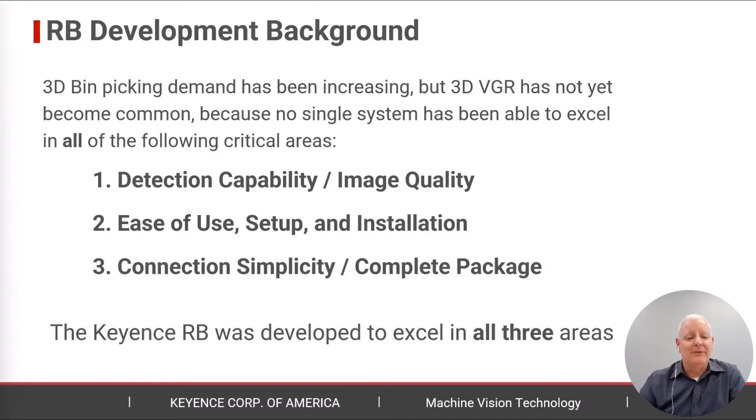I think you'll agree they're important: high image quality and detection capability, good ease of use, as well as easy setup and installation, connection simplicity, and with that, a complete package. So let's talk a little bit about how we've addressed those points.

To start off, Keyence's 3D bin picking product is called the RB. The RB actually comes in 4 different sizes that you see there on the screen. There's a small size called the RB500 that gives you very high resolution, but it has a small imaging area. On the right-hand side, you can see our largest model, which has a 1400 by 1400 by 1 meter deep imaging area.

So for larger parts, this is more suitable. We have a wide range of different heads that we can utilize. One thing you'll notice, it looks kind of like a drone. A lot of people call this the drone bin picking system. The reason is because we have 4 cameras, and these 4 cameras have to be spaced out to give a high quality image.

This equipment is actually designed for random bin picking, but actually a large portion of our applications are single part pick or structured parts, so we can handle either situation. But this is the general structure of our system. There's a pattern projector in the center that creates structured light, and then 4 cameras that actually create the 3D image to then allow for us to do the 3D bin picking process.

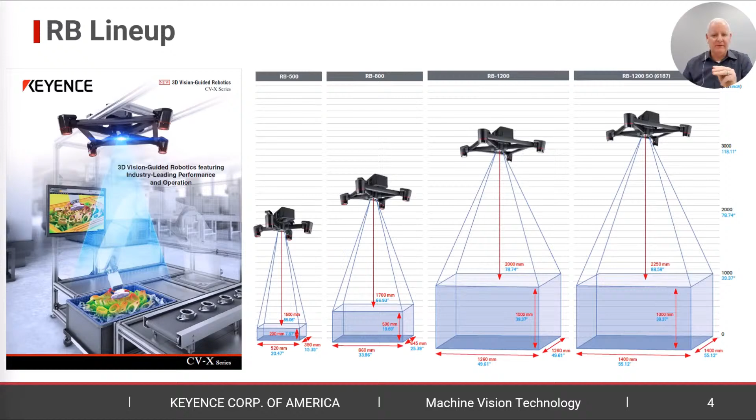I'd like to hit on those 3 points individually and maybe highlight some of the details. Let's start with the image quality topic. One thing I hate is when somebody says, hey, we got the best camera, and they don't explain why. Honestly, it's really simple: the fact that we have 4 cameras gives us a higher quality image than other systems that might just have 1 or 2 cameras combined with a structured light generator.

Why is that? Well, in 3D picking, when you have randomly oriented objects, you're going to have a lot of blind spots. Having these different camera perspectives allows you to see perspectives that you wouldn't be able to see with a single camera. So the simple reality is that you actually get a higher number of valid 3D data points when using this system.

Another thing to consider: many of the applications are shiny metal parts, and when you have shiny metal parts, you can create glare. Imagine if you have a projector and just 1 camera, and you blind that camera with glare - in that case, you're out of luck. And since parts are randomly oriented, some of these parts are going to create glare. But if you have extra cameras, say 3 extra cameras, you can actually create a very high quality image, and if 1 camera gets blinded from that glare, the other 3 fill in the missing data.

Each of these cameras is 4 megapixel, and what we're doing is we're actually doing 136 separate captures that create a single 3D image. That all happens in around a second or so, and the pattern projector occurs in the X and Y direction. So when I say we have a high quality image, it's pretty simple - it's down to these 4 cameras and this capture method.

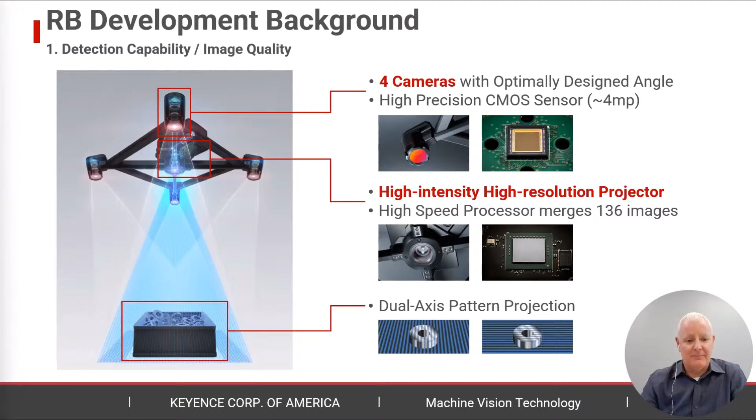Okay, let's talk about the ease of use. Now, ease of use is a little bit intangible, right? But there are some tangible features that we've got that really make it straightforward and quick to set up and learn. First of all, from a calibration standpoint, we have an auto calibration function, which we provide the program for your particular robot, which will automate that process.

It really makes it quick and easy. Also, we can do all of our teaching of grip and place positions on our software without the robot being connected. So you don't have to wait for the robot to be delivered. You also don't have to be standing on the floor to teach this thing - you can do it from the comfort of your desk.

Finally, from the robot programming perspective, we've got a couple features that really set us apart that can make your life easy and lower risk. The first is the path planning function. Path planning allows our system to determine the entire path of the robot for you, so you don't have to worry about it.

We handle all of the collision avoidance and singularity avoidance. In addition, we have a picking simulator which uses a physics engine that allows you to fully test out your end-of-arm tooling prior to ever purchasing the system. So it really allows you to understand on the front end if it's going to work or not, or have a good shot of working.

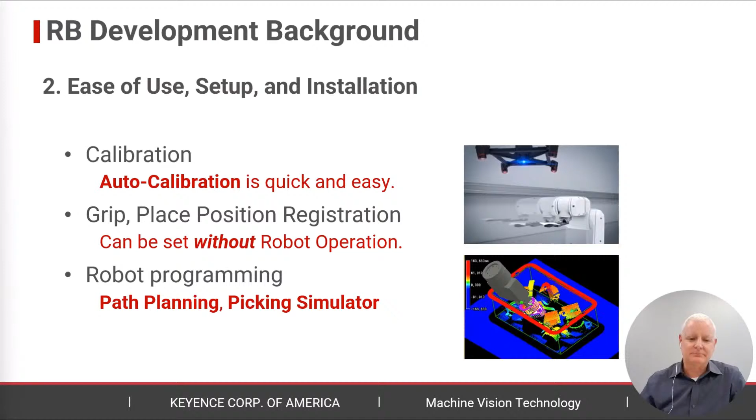All right, the third point, connection simplicity. So the drone, the imager and projector you see on the left-hand side, that's all one piece and there's no moving parts. So you don't have to adjust the focus, the aperture, anything like that. You basically mount it above the work cell and every adjustment inside is electronic. You then connect that to one of our vision system processing units.

This is a very common product. There's 60, maybe 80,000 of these out there in the US. And this is dedicated to image processing and does not use a PC. So you don't worry about OS updates or anything like that.

That then connects directly to the robot controller. And I'll go over some of the different brands we work with, but we actually provide the code that manages that communication. So we very much eliminate the finger pointing that often exists when two vendors are trying to interface with each other.

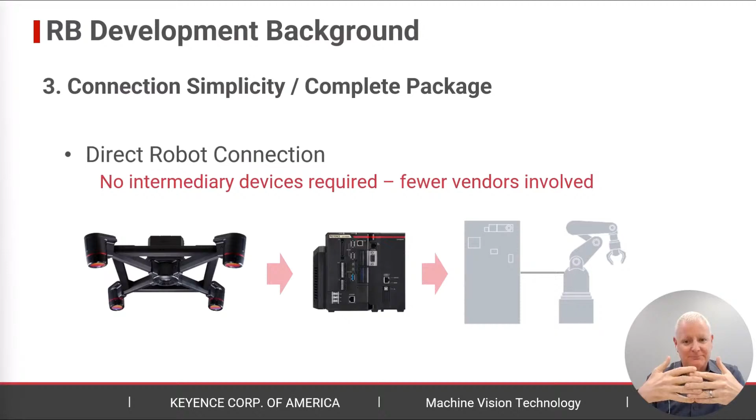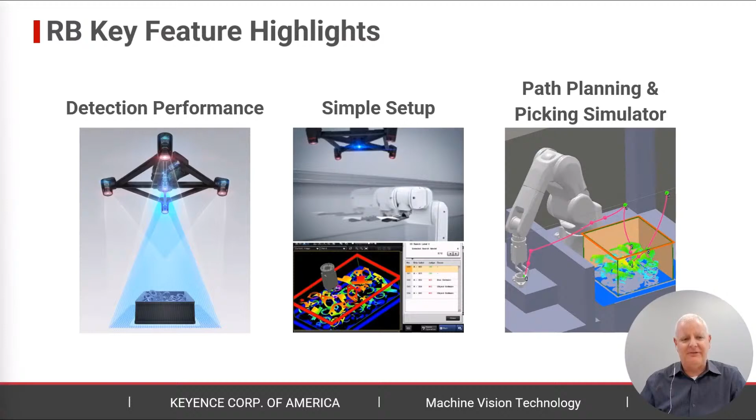All right, let's talk about some of the key features. First, let's talk about detection performance. If you look at that bin on the left-hand side, one thing you're going to notice is those parts are very thin and very shiny.

So they do create glare, and for many systems these are difficult to detect reliably. If you look at the 3D image on the right-hand side, what you're going to notice is that there are a high number of valid 3D data points. What's a valid 3D data point? Any area that's not black. So you'll notice outside of the bin and on the walls, you're getting a lot of invalid pixels. But down there in the corners and on the parts, you can see that it's a very, very complete, high-quality image. And that's down to having those 4 cameras.

On the right-hand side, maybe a little bit hard to see, but there are actually little notches at the 12, 3, 6, and 9 o'clock position on those parts. They're very small as a percentage of the part as a whole. However, we have the ability to assign something called a key feature region, which allows us to better clock that part once we pull it out. And it may allow us to avoid having to have a 2D camera connected, which will then do an offset. That being said, that is an option, and I'll go over that later for our system.

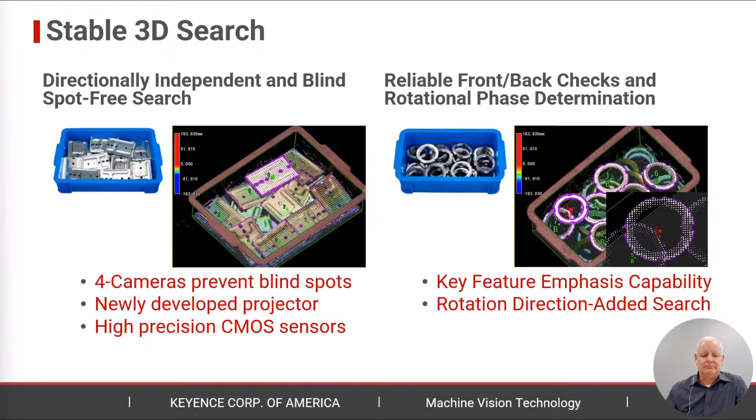Okay, I mentioned before that imaging can be a challenge for 3D picking. If you have shiny parts with flat surfaces at an angle, you can actually project the pattern onto adjacent surfaces, which can cause problems. We actually have a feature that actually helps with this called multi-reflection suppression. Honestly, a lot of people don't need to use this, but it's good to have in that toolbox just in case. So we have this feature that can help you if you need it.

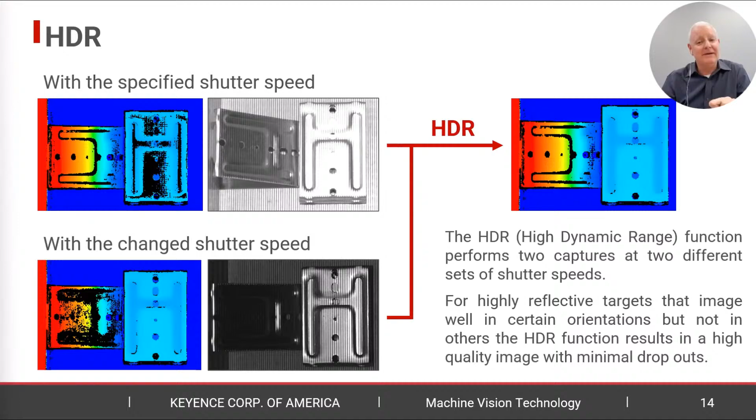Another feature that can help with difficult imaging scenarios is HDR, high dynamic range. Those of you who are familiar with vision systems or photography might know that HDR allows you to capture at 2 different shutter speeds. In this case, what we can do is combine the 2 images together to get a higher quality image. This is another feature that most people don't need to use, but when you need it, it's good to have in the bottom of the toolbox just in case.

All right, so let's look at some videos. We'll start with the one on the left-hand side here. Those are the parts being picked. You can see that we are picking with suction, doing full collision avoidance on that wire basket. We're finding the wire basket and also presenting to a 2D camera at the bottom of the screen, then doing a fine position offset before we place that part.

Now you'll see the flashing in between each capture. That's the 136 separate pictures that are being taken.

Now let's look at the one on the right. What we're going to see is that those parts are being picked from that stack, and those parts are very thin and very shiny. Notice how consistently those parts are being placed. In the upper right-hand corner, you can see that the boundary is very effectively extracted.

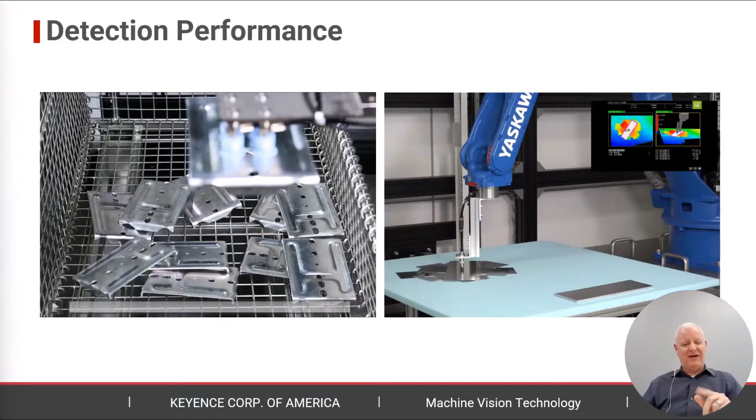That's down again to the 4 cameras. We also can separately tune our boundary and our surface search algorithm portions, which can allow us to get a better result for this. This is actually very, very difficult, and I don't know of other folks who can do this type of application.

All right, let's move on to the setup. Now, one thing I mentioned before is that we have an auto calibration feature. I'm going to show you a video in just a second, but before I do, I want to go over the different robot brands that we interface with. Everyone that you see in this list, we actually have auto calibration available for.

Now, if you're not in the list, it's okay, it can still be possible. We just choose custom in that case. But I think you'll see most of the usual suspects here, right? Fanuc, Yaskawa, Kawasaki, Kuka, ABB, UR. Fanuc is the most common for us to work with. In the US, it's probably the most prevalent brand, and therefore the most common that we're working with. But all of these are ones we work with on a regular basis.

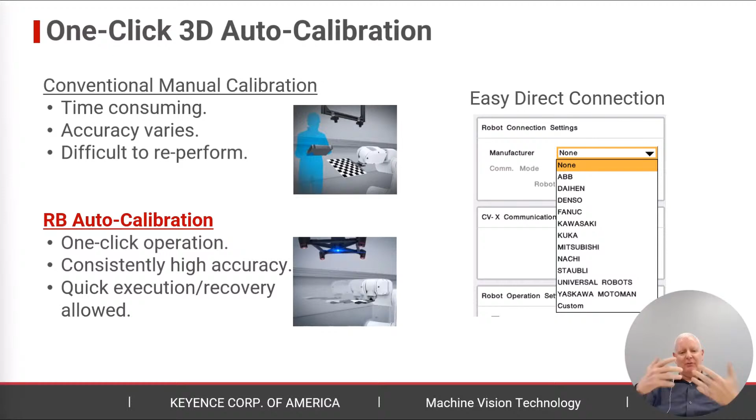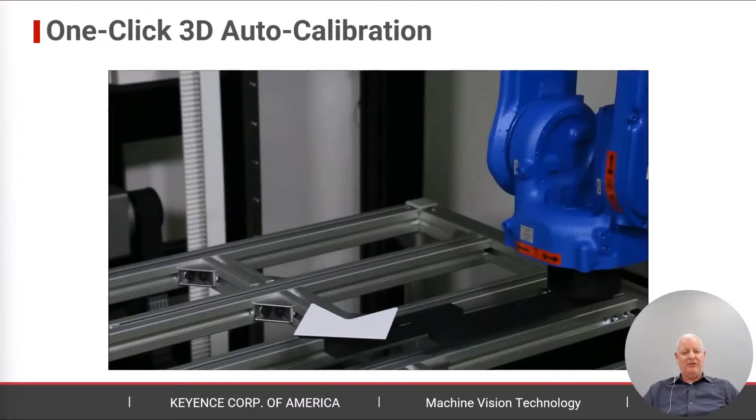All right, so let's take a look at the calibration and how it works. This is a video from one of our labs, and what we're doing is actually executing the auto calibration process. We're driving our calibration target around to 27 different points and recording the position of it. Then at the end, we're going to rotate around the tool center point, and when we do that, we're able to infer the position of joint 6. After this process, we know exactly where in space the robot is compared to the vision system.

So this can be very useful as a time saver, especially when you're going to be handing this process over to someone who may not be a robot expert.

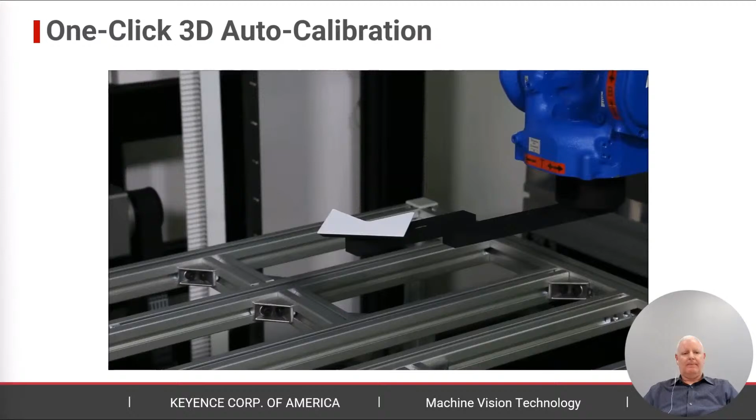All right, so let's talk about place position registration. On some systems out there, you actually have to teach a place position that matches every pick position. And if you have 50 pick positions, this can get very, very tedious. On our system, you only have to teach a single place position for each search model that you teach. So it can be a big time saver.

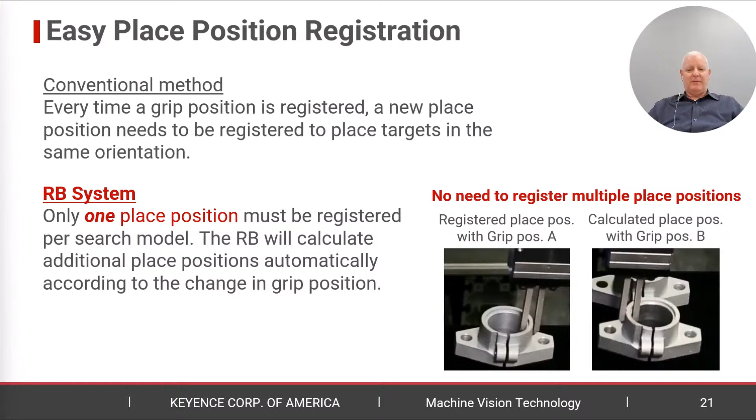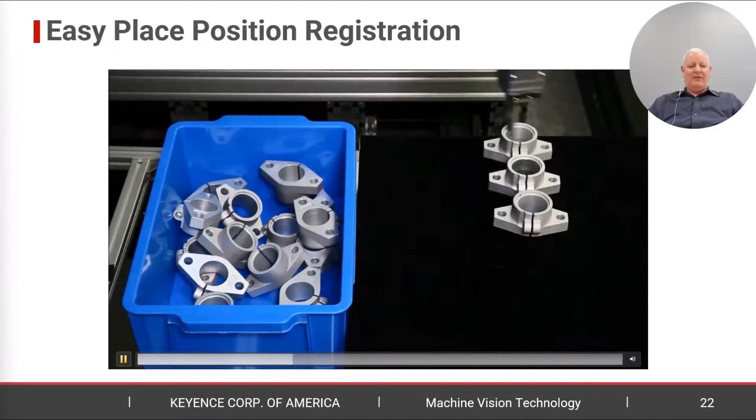So let's watch a video of these parts being picked. Notice we're picking from a different spot each time. What I'm also going to do is try to pause it right when it's taking a picture. See if we can get it on the next capture.

Okay, so it's a little bit hard to see, but you can see the stripe pattern that occurs right down the lower right-hand corner. Again, 136 pictures are being taken during this second or so period of time. We figure out the place position despite the fact that there are many, many pick positions taught on the system.

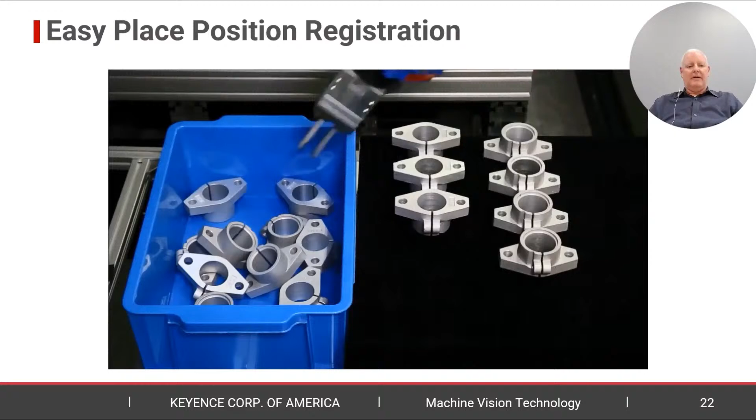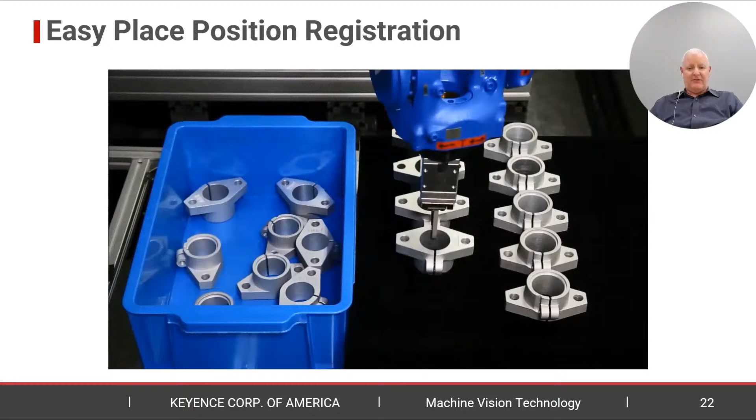Okay, let's move on. In a moment, I'm going to go into our software and show you nearly from start to finish how to set our system up. But before I do, I'd like to cover again 2 key topics that I mentioned before, because they're really important and really valuable in terms of shedding risk.

So let's talk about the path planning and the picking simulator. What things do you have to worry about? I mentioned a whole list earlier in the presentation, but if you're a robot programmer, you've got to worry about whether the robot's going to hit things in the environment, whether the tooling's going to hit things, and then after you grab that part, especially if they're long parts or big parts, you've got to worry about them hitting things in the environment. So there's a lot of things to worry about.

So when you're designing the machine, what do you have to worry about? Is the robot size correct? Have you put it in the right place? Is the container suitable? How about the aspect ratio of the container? If it's too deep, it can be very difficult to get down inside of. Probably the biggest variable you have to think about is the end of arm tooling.

The reality is that you don't really know if all this is going to work together until you build it. And by the time you've done that, you've invested a lot of time and money. So there's a lot of risk there, right? What if it doesn't work and you've spent all that money?

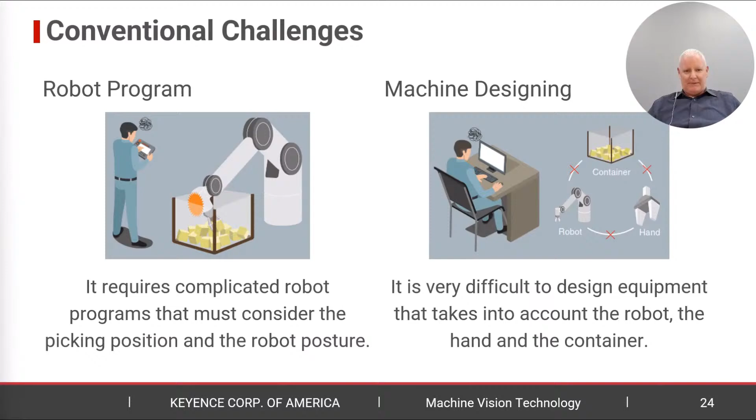Okay, so let's think about that while we're thinking about these two features. Path planning is going to allow our system to determine the entire path of the robot for you, so you don't have to worry about it. We make sure that no part of the tooling, the product you're picking, or the robot itself hits anything in the environment. This allows you to also very quickly handle all the constraints of getting down inside that bin.

The picking simulator actually allows us to create a virtual bin of parts that are randomly oriented using a physics engine, and then we can go through and build the program in our software and fully test it. Again, you can do all of this before you ever buy a robot or build anything. So this is a huge risk mitigation feature.

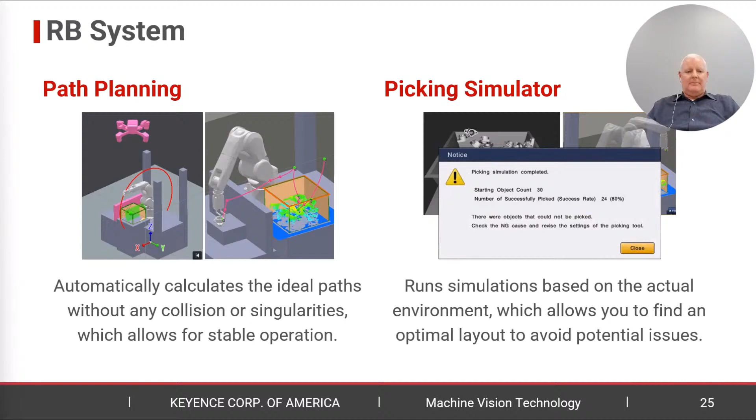All right, so let's get into the software. Before I do, here's a simulation running. This is actually pretty difficult, right? We have an obstacle on the corner. We've got a bin that's fairly deep and narrow, parts that are randomly oriented, and we're getting down inside that bin all the way to the bottom and then placing those parts onto that little pedestal. So this is actually the simulator running in our virtual environment.

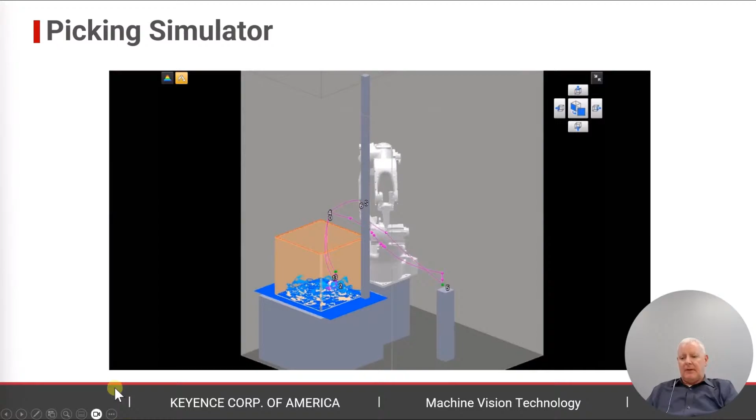Okay, so what I'd like to do now is actually show you how our software works. This will only take maybe 6 or 7 minutes. So let's go ahead and get back into it.

This is actually our CV-X software. So what we're going to do is start by clicking Set Camera, and then I'm going to go over here and choose a model. Now I'm going to actually use the mid-size RB800 model for this demo. One cool thing we've got is this auto-tuning button, and this auto-tuning button actually allows us to place a bin of parts under the camera, and then when we click that, it's automatically going to figure out the optimal shutter speed for us.

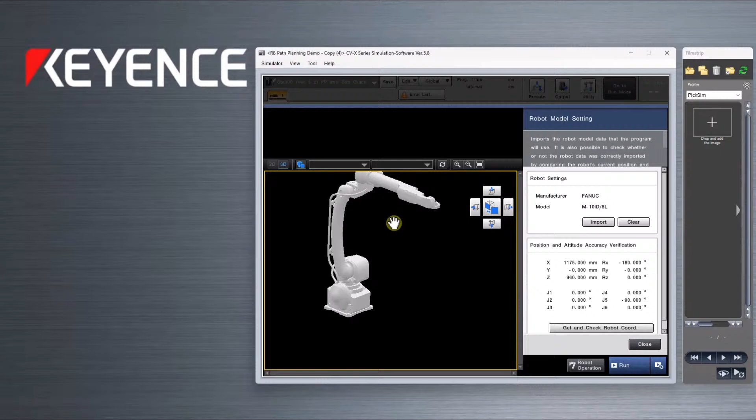All right, next step, set robot connection. So what I can do now is choose my robot manufacturer. You'll see the same list you saw a moment ago. And what we're going to do here is choose FANUC. The reason I'm choosing FANUC is because I happen to have a robot model for FANUC already loaded into the system. We'll click Edit and Import, and then I can load in this FANUC robot model data. This is an M-10iD/8L, downloaded from our website. We're going to do full collision avoidance and path planning on this robot. So let's click Close.

And the next step normally is going to be calibration, but I'm not actually connected to a robot right now, so there's not a whole lot I can do here, but you saw the video, so I think you have an idea of how this works. Let's go ahead and move on.

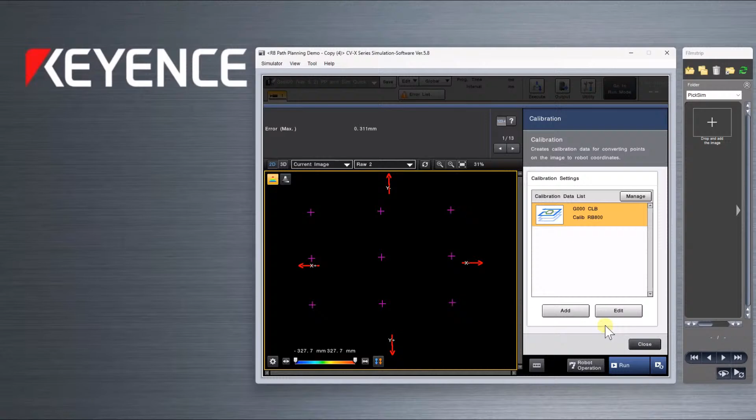I'm going to now click the simulator button, the picking simulator button, and this will allow us to actually build a program. There are other ways you can get through it too, but everything is actually located under this menu, so this is one option. When I click that, it gives me this 3D viewer, and this 3D viewer is actually what we're going to use to see the process.

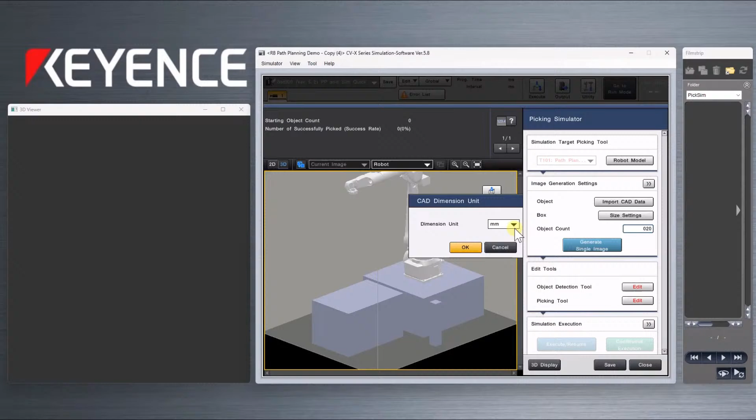So what I'm going to do now is go in and click Import CAD Data. All right, let's click Import CAD Data, and I'm going to actually load in this shaft holder, which is our part. We'll click Open, and then we can choose the units, which are going to be millimeters. We'll click OK. All right, this is the part we've just loaded in. That should look familiar, it's from that video you saw a few minutes ago. We'll click OK, now it's loaded in. Great. Okay, now we're going to choose the number of objects that we're going to throw in that bin.

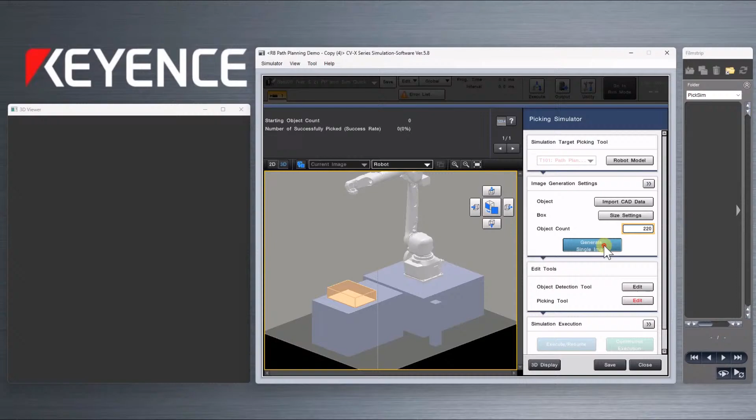Let's choose, I don't know, maybe 220. We'll click OK and generate single image. All right, there we go. We are now populating that. Uh-oh, too many parts. Okay, I knew that was going to happen.

But I really wanted you to see our physics engine at work. All right, 220 is too many. We'll probably dial that back to 20 to keep things going. But I really wanted to highlight how this does a great job of randomizing these parts.

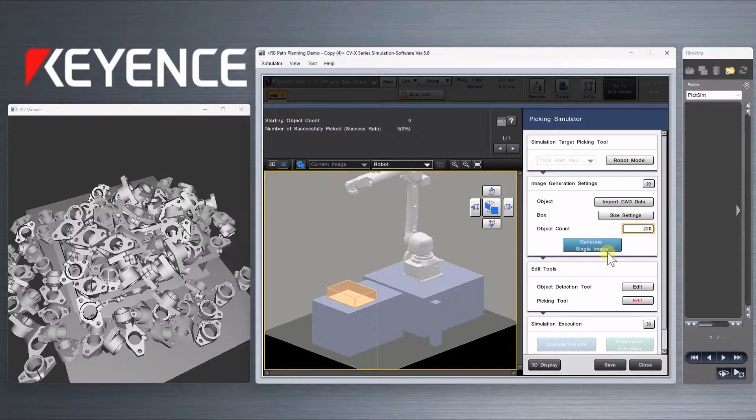I was skeptical at first, but I'm now sold on this. Okay, let's click Abort, and let's go back to maybe 20 parts to keep things moving along. All right, 20 parts. Great. Image generation completed. We can now move on to our object detection tool.

Okay, without doing anything else, we already are identifying all these parts in the bin. And what you'll notice is that there's some markings on these parts. So for example, this part right here, it says 8D96. So this is part number 8. It's a 96% match, and it's actually face D that's been identified.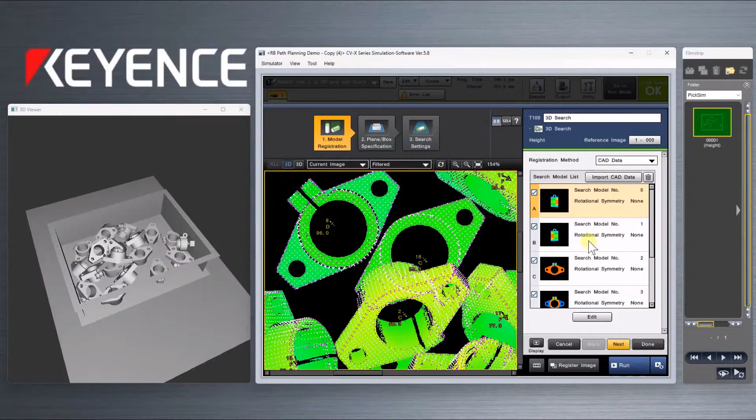Now, what is face D? Where did that come from? Well, the system automatically, when I load the CAD data in, figures out that there are X number of faces that are suitable to teach picks on. In this case, there's 6. And we've got A, B, C, and D. That matches what you see right there. We also have E and F. So we can teach pick points on any of these faces.

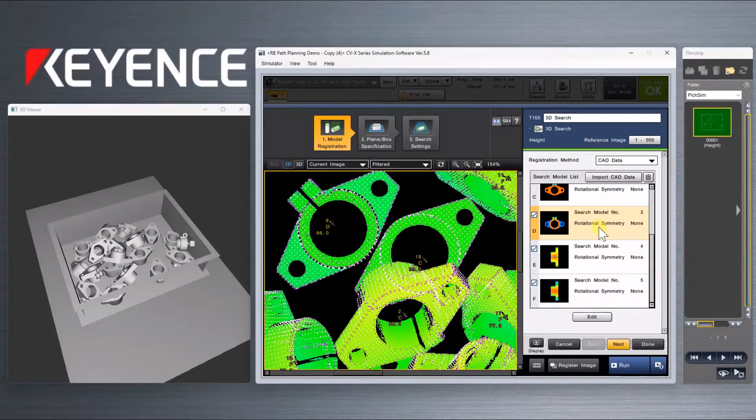All right, let's go down to the Picking tool now and show you how we actually set up the picking. So we're going to start with primary settings. We'll start by creating an object model.

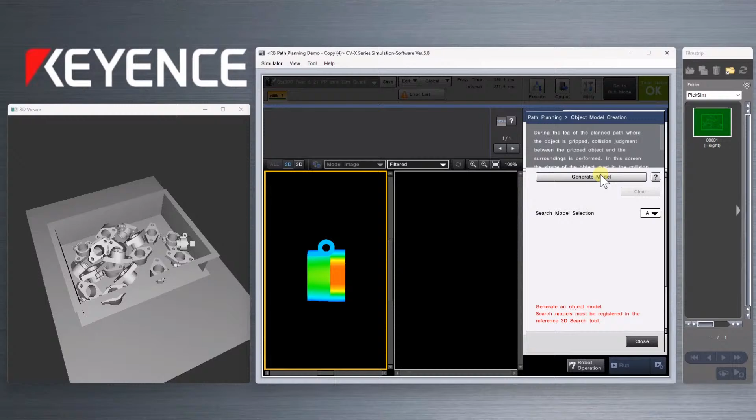Now I'm just going to click Generate Model here. The reason this step is in here is because our system has the ability to not only use the CAD data, but to also use an image that we actually capture with the system.

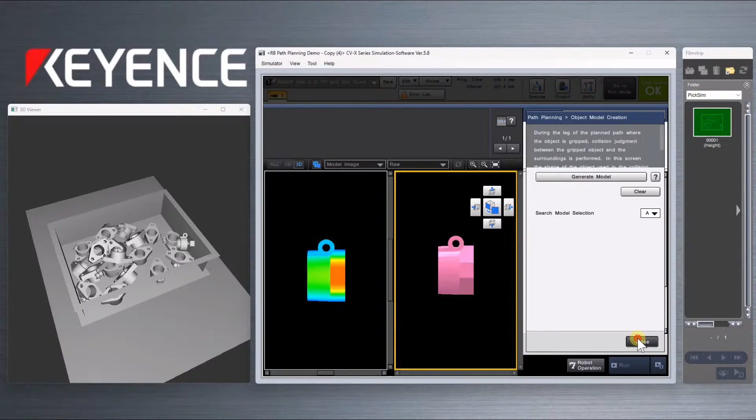Okay, so let's continue. Now that we have this image in our system, we'll click Close, and we will go down here to Hand Settings. This is where you can create a hand model.

So we'll go in here and actually click Add, and I can load in CAD data for my end of arm tool. So if I've designed a gripper or downloaded it from a website, I just click Open, and then I choose my units. All right, there's our tooling.

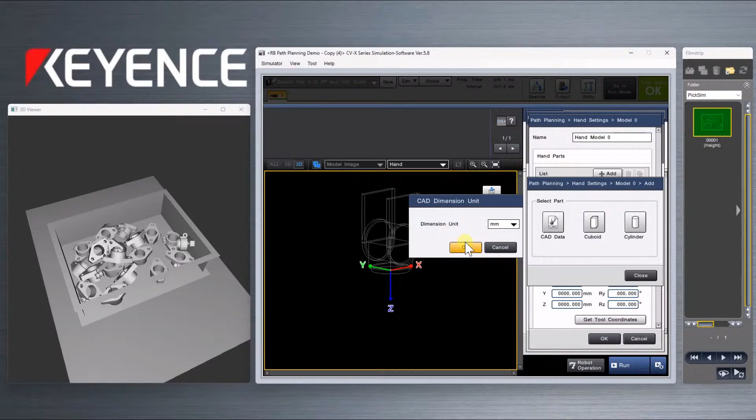This is what we're going to use, and I can adjust a variety of things on this. I can actually add cuboids and cylinders as well, but in this case, all I'm going to do is move my tool coordinates away from joint 6 down here to between the fingers. So this is where we do that.

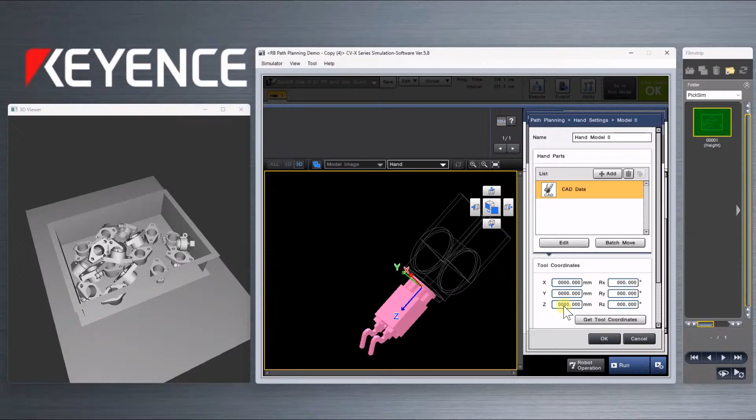Alrighty, we'll click OK. There we go. And now we will go to the next step. All right.

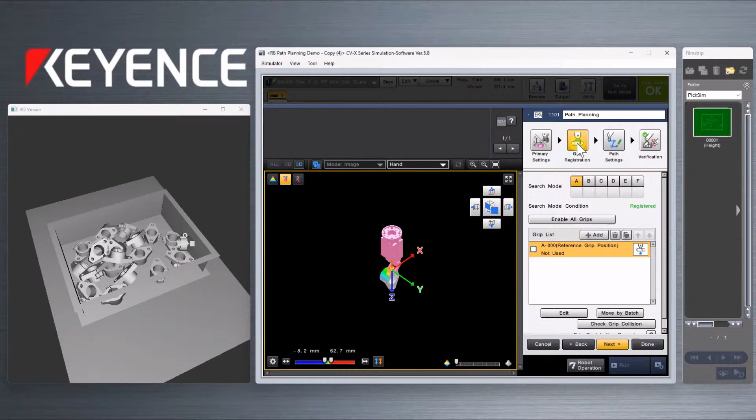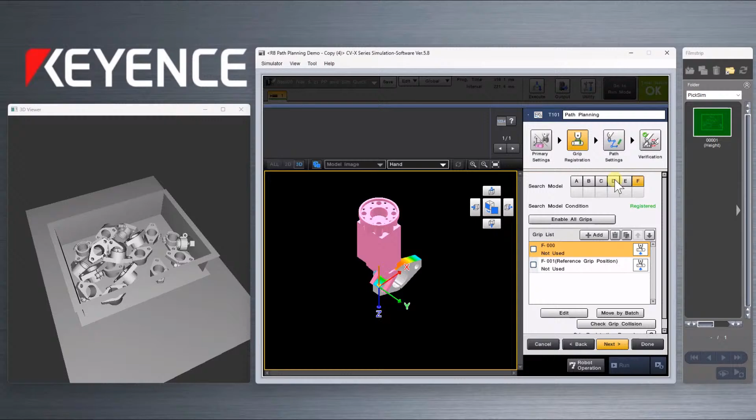Now we're going to actually teach some picks. So how do I do that? I click Grip registration, and we'll zoom in here. You'll notice that we have A, B, C, D, E, and F. Okay, so you'll also notice that we've already taught picks on all these places. It's because I cheated. Not really, I just don't want to bore you by showing you on all 6 faces.

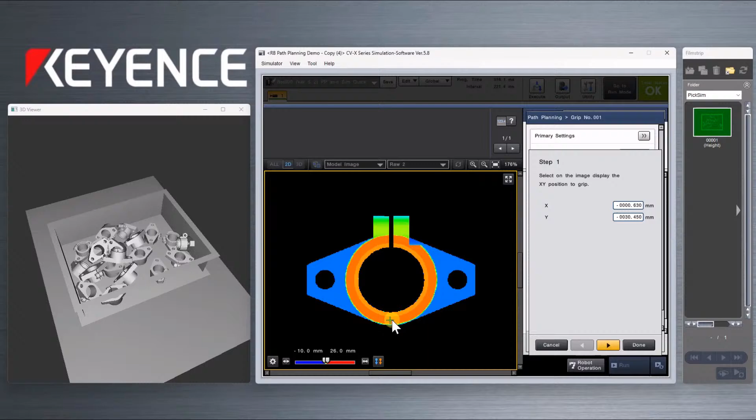That being said, I will show you how I taught at least one of these so you know how it works. All right, so how do I replicate this grip we see right here? All I do is click Add, click Grip Registration, register by clicking on the image, and then I can click anywhere on this 2D representation of that face. So right here maybe, that crosshair is then stored, the X, Y, and Z position of it. Now we'll click Z Fit to Object. All right, great. Drops it down and matches the tool coordinates with the crosshair.

All right, when you look at that part, you may be thinking, hey, that part is circular. Can I teach picks all the way around? And the answer is yes, and it's very easy to do. So we can actually rotate around the Z-axis. Now, see that blue dot? That's actually our axis of rotation. And I don't want it to be on the tool center. I want it on the part center. So I'm going to actually move that over about 1 inch.

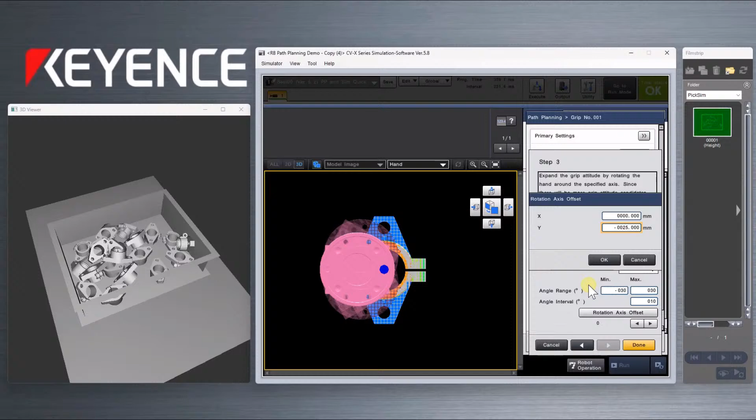Now what I can do is choose an angle range. In this case, I'm going to choose plus or minus 130 degrees, and then I have an angle interval of 10 degrees.

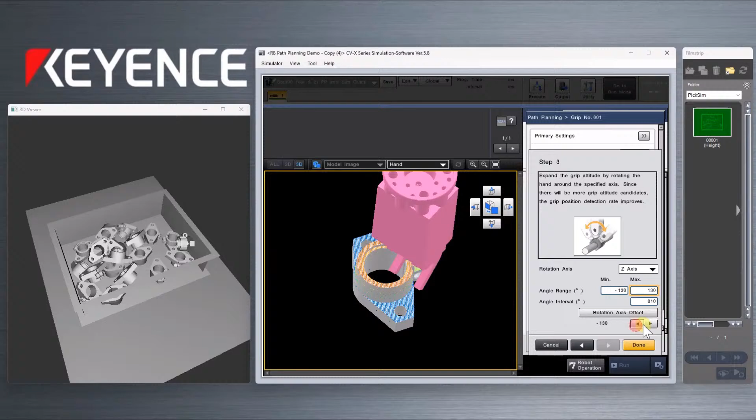What I've just done is taken that original pick and copied it 26 times. The system will automatically figure out which of these are viable picks, throw out the ones that aren't, and pick the most efficient ones. So teaching many picks is very quick and easy to do.

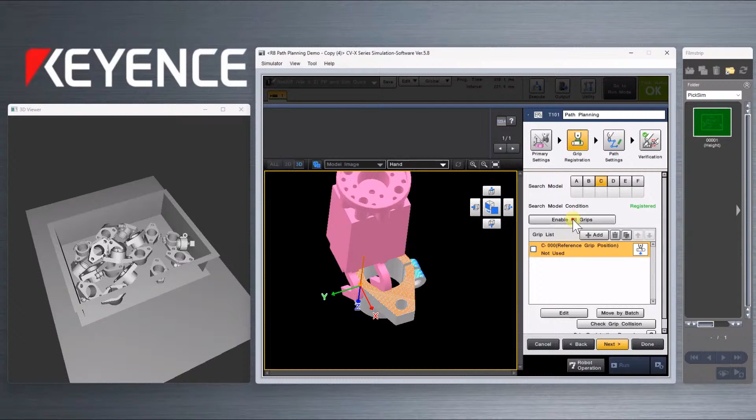Before I proceed, I'm going to enable all the grips that I taught before, just so we can use them. Now we can move to the next step, and we are almost ready to run this thing.

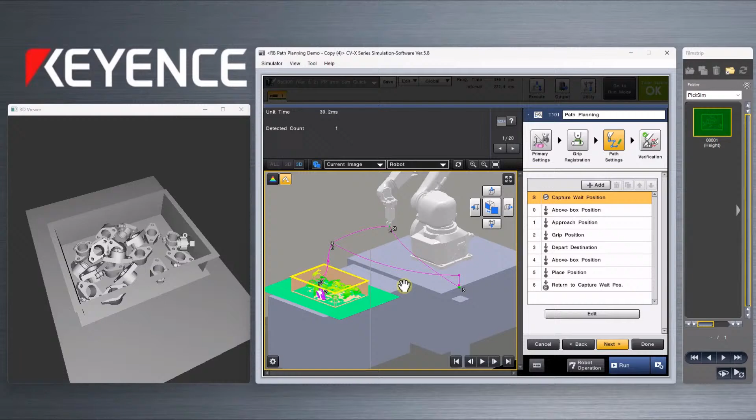The first part is already identified in the bin right there, and a path is already generated automatically. But some parts of that path need to be specified by the user, for example the place position. So how do we place that part right there?

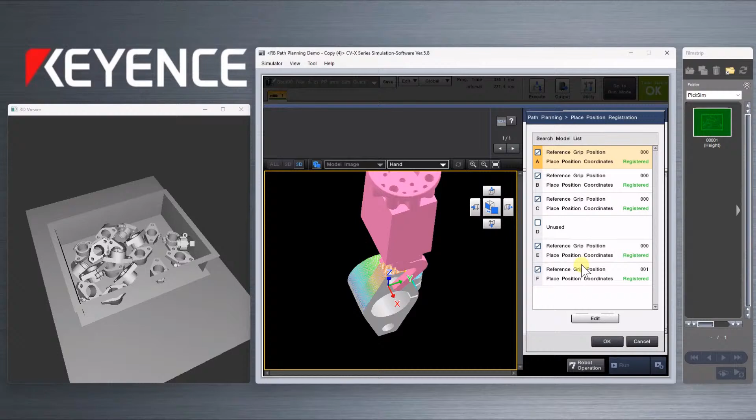Let's go in and edit those coordinates, the place position. We go into place position registration. You'll notice A, B, C, E, and F are already taught, but D is not taught—that's the one we just did together. So let's teach that one.

Click Edit, go into Search Model. We'll choose a reference grip position—I'm going to choose the one that we taught together. That's this one. Click OK.

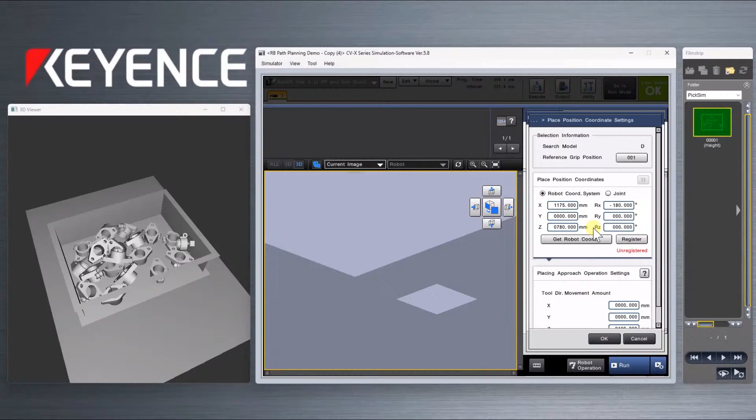Then what we're going to do is actually zoom out. Now, if I'm not connected to a robot, I'm going to need to actually jog this robot around virtually. So I happen to know where this needs to be, so I'm going to move joint 1 over maybe 50 degrees. I can also enter robot coordinates directly or jog these directly.

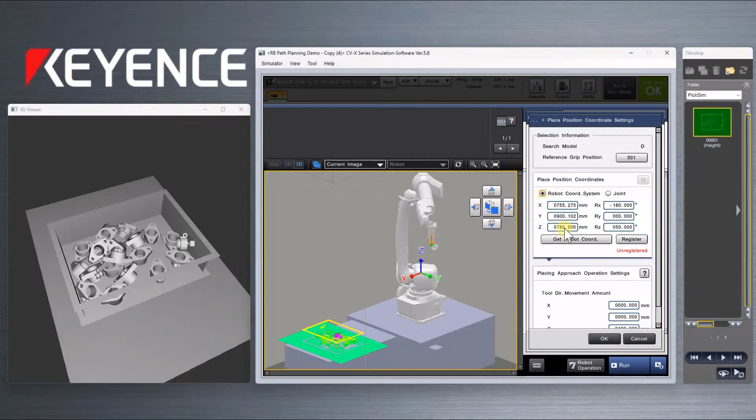Again, I know exactly what these need to be, so I am cheating a little bit here, but you get the idea. If we're happy with where that's being placed, we can go ahead and click Register. This can be adjusted later if we need to. So now that's stored—anytime I pick from the D face, I'm going to place it exactly like this.

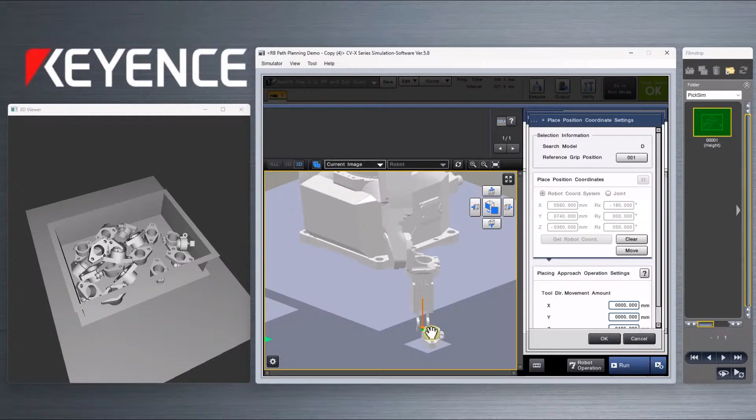So we are about ready to run this thing. I'm going to click Next and Done a few times and get to the top menu. And now comes the fun part—we get to run this thing. So I'm going to click the Execute button and watch what happens.

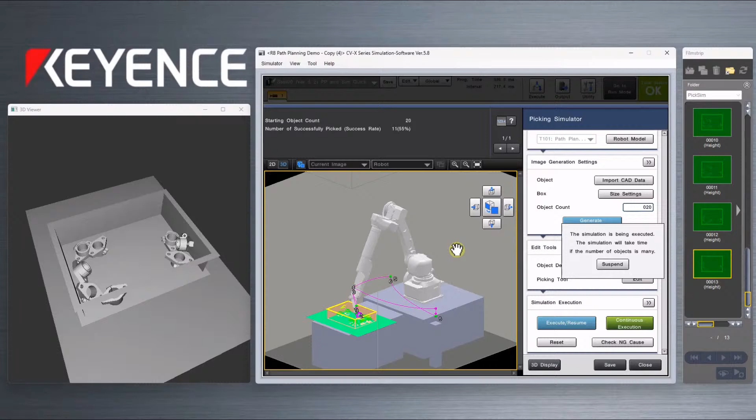On the left-hand side, each part will turn red before it gets extracted. You'll notice adjacent parts will fall into place and readjust. The path will be updated in the center of the screen each time, although it's not going to change very much because this is actually a pretty shallow bin, no obstacles in the way—pretty easy, honestly.

On the right-hand side, there's a capture stored every time we created an image, so you can always go back and rerun if you've changed the program.

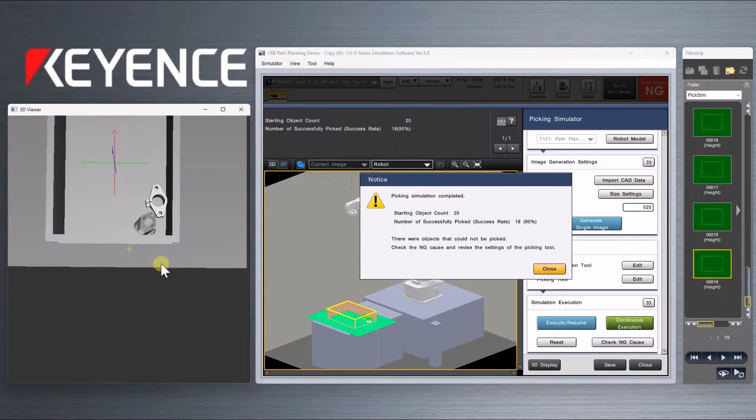Now, on your first run through, you're guaranteed to have some parts that didn't get picked. These parts don't look so hard, right? All right, we got 90%. Well, what was the problem here? We don't have to guess because we have a tool that actually helps us understand what went wrong.

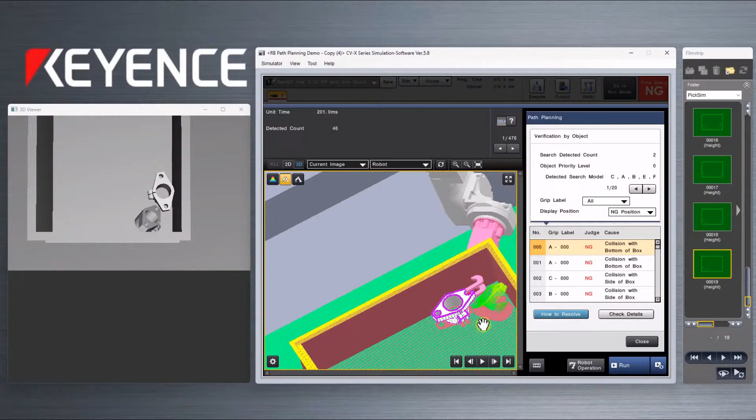So I click Check No Good Cause, and let's zoom in and see what's going on with this part. So this is the part we're looking at—I could also look at the other part, like this.

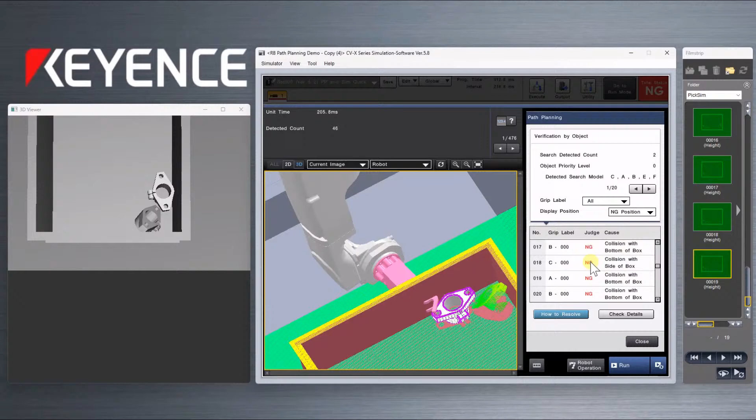But notice that I can see all the possible picks that were taught, and there's maybe 70 or 80 of them there. I have all these problems, and it tells me what they are: collision with the bottom of the box, collision with the side of the box, object collision—all these different problems. None of them worked, and that part's pretty easy.

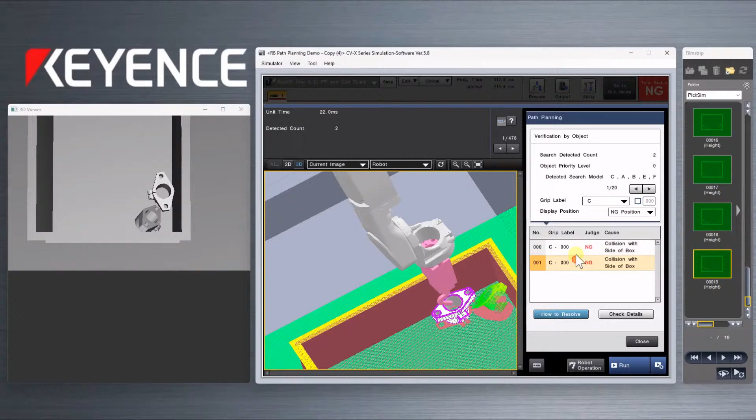So what can we do here? Well, I can see that actually the C face is sticking up, so I can zoom in and see what's going on. I see that I was not very thorough when I taught my C face—I got 2 picks there, 180 degrees off from each other, and very clearly we are hitting the side of that box. How could we fix this? Well, we could probably teach a pick on this side and grab that part.

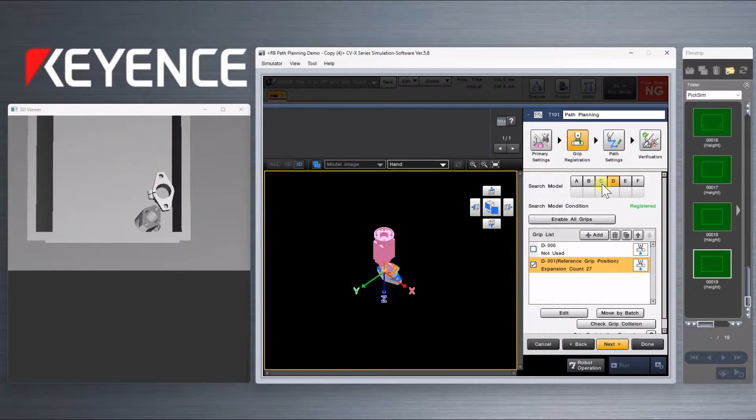So watch how fast we can do this. We just click Close, Picking Tool, Edit, go to C, click Add, Grip Setting Navigation, register by clicking on the image. I'm going to click up here this time instead of down here. Go to the next screen, Z Fit to Object. We have just taught the pick. Now let's go test it.

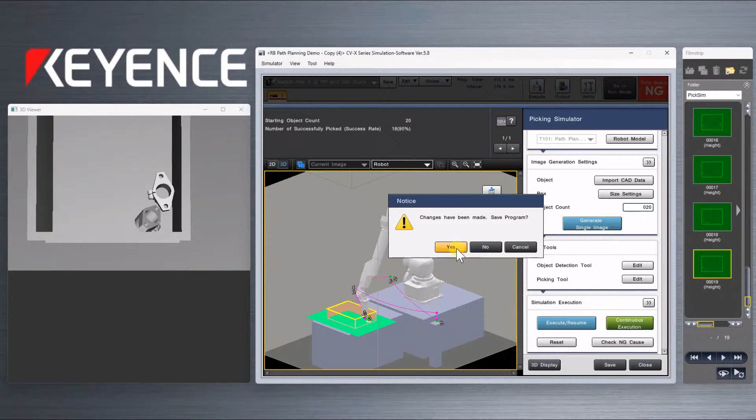Click OK, done. Now, when I click Execute, we'll see if that part is extractable. Hopefully it'll turn red. Great. Okay, now we're 95% there. However, we've still got this part that we can't get.

All right, so we can go through the same process again, but honestly, sometimes a part will be in an orientation where you can't grab it. So if you're in that situation, we have some unique features that allow you to get out of that situation and deal with it. So this is actually the end of the programming portion. Hopefully you enjoyed that. But I'm going to show you a couple videos now that show you how you can deal with these difficult part orientations in a very elegant way.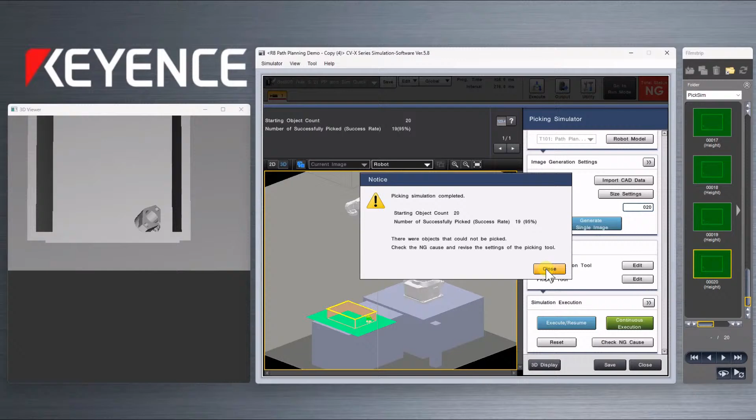Okay, so we are going to go ahead and pop up the current screen. And we have these features called departure settings. This describes what we do when we can see the part, but we can't get it out. Well, let's go ahead and take a look at these videos.

Okay, here's the first one. You may notice that that part corner is under this horizontal member. If I try to pull that straight up, it's going to get stripped off, but watch this. Did you see that? We just checked a box in our software, and we actually pulled that part out of the way before we lifted it up. Not that fancy, but it's a very simple and easy thing to do with our software.

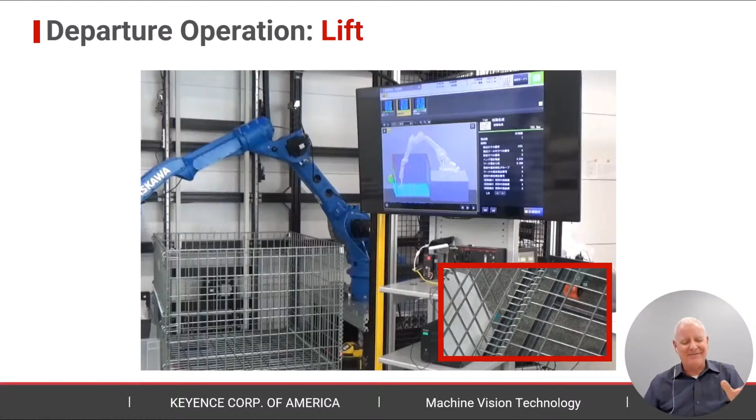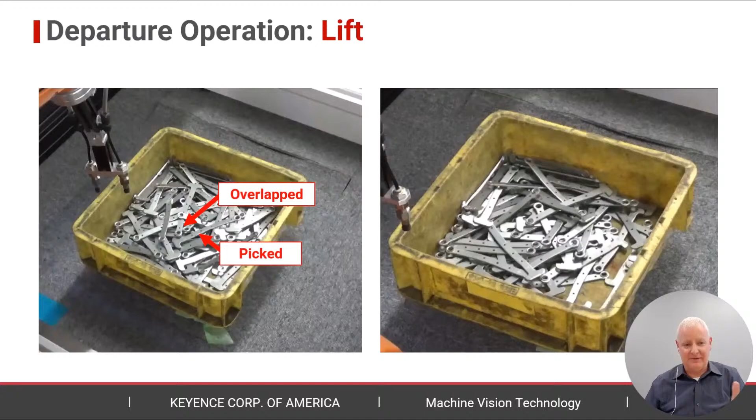Here's another example. Parts can be overlapped and get stripped off like this. Big problem. However, our system actually has the ability to identify this situation and automatically move parts over. So watch this. We see the part, we slide over, and then we pick.

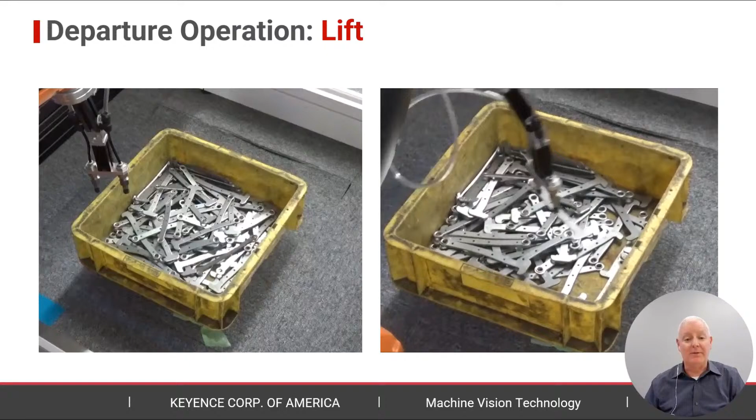Here's another example. Cylinders get stuck in corners where you can't grab them with fingers. This is very common with fasteners, so watch what we can do. No pickable parts right now, but we can do this. This is a secondary operation called a slide. It only executes when there's no valuable or valid picks. Now we can go back, re-image, and grab the part the way that we really need to.

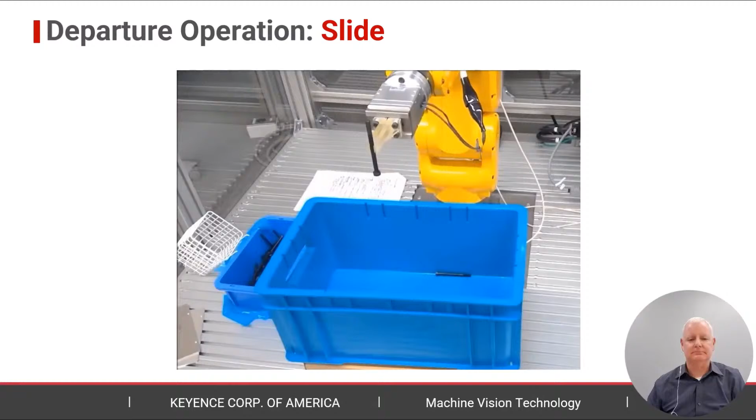And one last example, same part you just saw in the software. Let's say we want to grab it from the face that's up against the wall. We can't do that, right? So we're out of luck. No valid picks right now. But we can still use our slide operation because we can see that part. Now let's give it a shot. We go down, make contact with the part, move over. Hopefully we move it, and then we can re-image and grab the part the way that we want to.

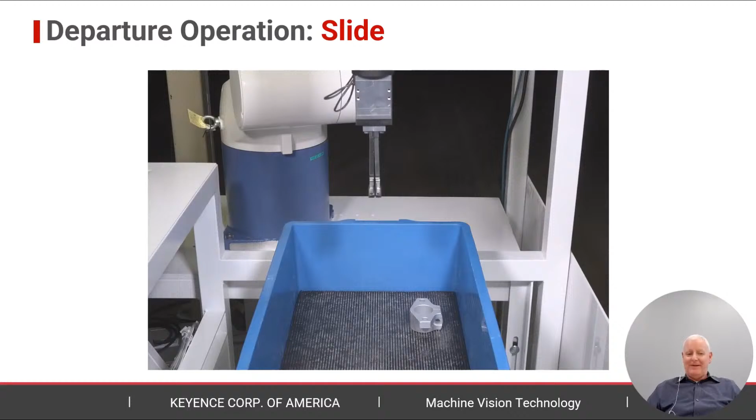This isn't a silver bullet. It doesn't solve every problem, but it's a much more elegant way of stirring a bin or avoiding operator intervention that has to be manual. So this can be a very, very valuable feature.

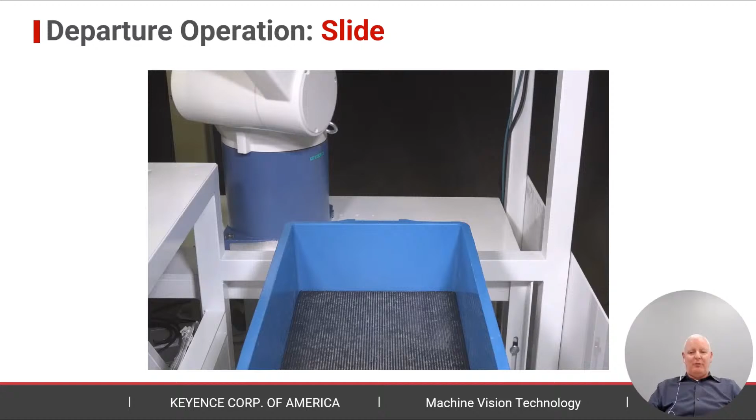Okay, so last point. Most people are curious if they have an application, how do they move forward and test it out and see if it's going to work? So Keyence has a headquarters in Chicago, Illinois, and in that headquarters we actually have a robot lab where we have multiple robot brands, and we are actively doing testing.

So customers on a regular basis are sending us bins of parts. We're recording videos of the picking process. We're also doing simulations, just like you saw a few moments ago. We'll record videos of those simulations and then send them to you. You can also visit this lab virtually or in person if you'd like.

If you do decide to go forward, the equipment is all stock, available overnight, and we will do a design review with you to make sure you're not overlooking anything. We do offer vision programming training and assistance. We offer virtual training for free once a month. We do have training videos and setup guides, phone and email support during business hours, and on-site as needed.

One thing we have found is that actually a lot of support can be provided very quickly via screen sharing. So we've found that this is actually a very, very effective tool in terms of helping customers in remote locations.

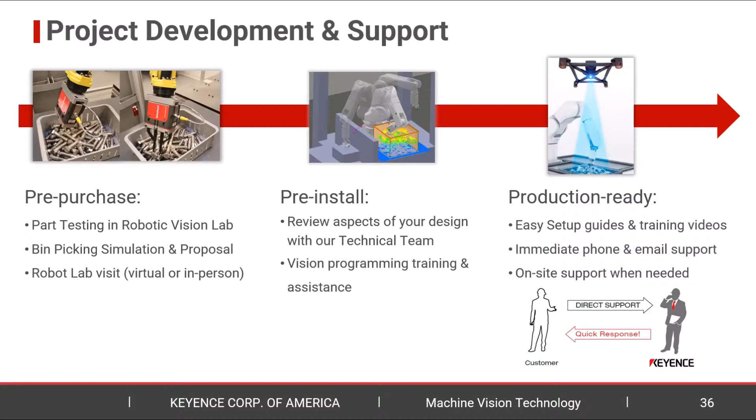I was really impressed by one of the early videos that showed the picking and alignment of those thin metallic plates. I worked on a similar problem earlier in my career, and I can attest that all those problems you mentioned, like glare and edge detection, are really difficult to solve. So using a 4-camera solution probably would have made my life a lot easier. Yep, everybody knows glare is a big problem for machine vision, right? So anything you can do to help with that is definitely nice.